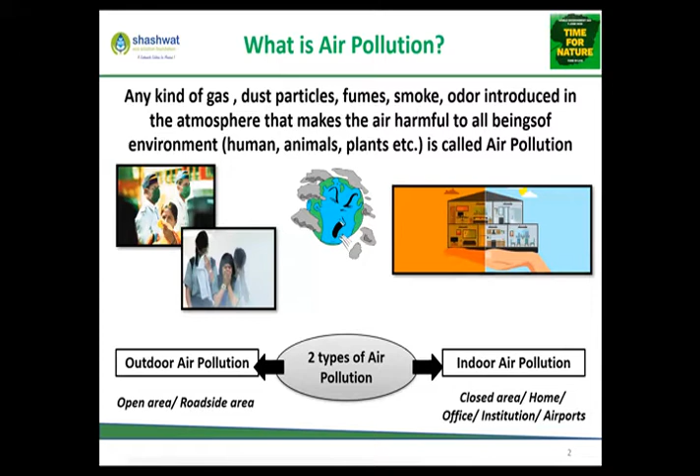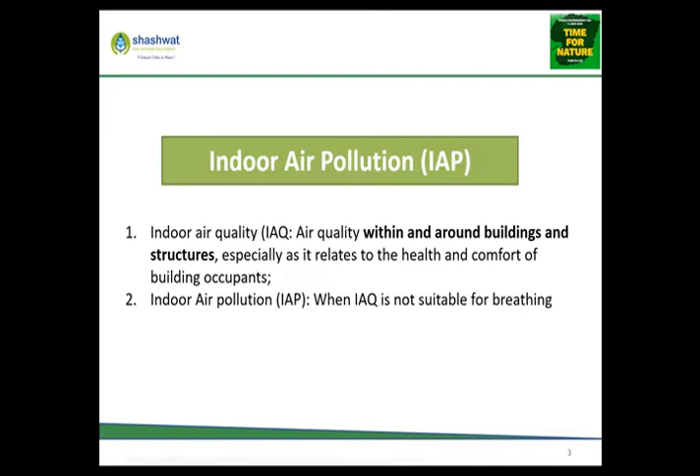So let's understand what exactly is indoor air pollution. Before that, let's understand what is indoor air. Basically, that air which is inside any enclosed area is indoor air, and the quality of that air is indoor air quality. If that quality is not suitable for breathing, then we say that indoor air is polluted. This is the simple way we can define indoor air pollution.

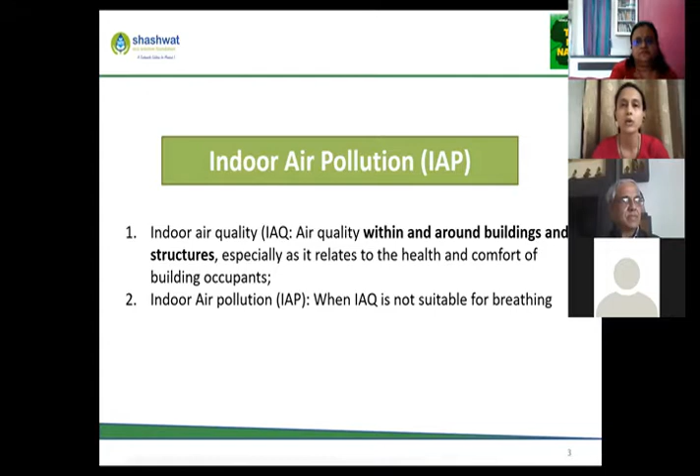So what exactly comprises the indoor area? It is not just restricted to our houses, but also includes offices, workplaces, institutions, malls, airports, temples, warehouses. All these areas are enclosed within walls, may it be small or big, but they are enclosed. Whatever air is present inside is called indoor air, and these areas are called indoor areas.

The major sources of particulate matter 2.5 in our day-to-day activities is burning of dhoop, agarbattis, or mosquito coils. These are one of the major sources. Then there is garbage burning near my house; the polluted air generated from the garbage enters through the windows or doors into my house, and then my indoor air also gets polluted. This is also one of the sources of indoor air pollution, especially dust particles, that is particulate matter 2.5, and also carbon content.

Then comes cooking fumes, or burning of chulhas or kerosene. All these things generate carbon monoxide and particulate matter, and also water vapors. So they are also one of the sources.

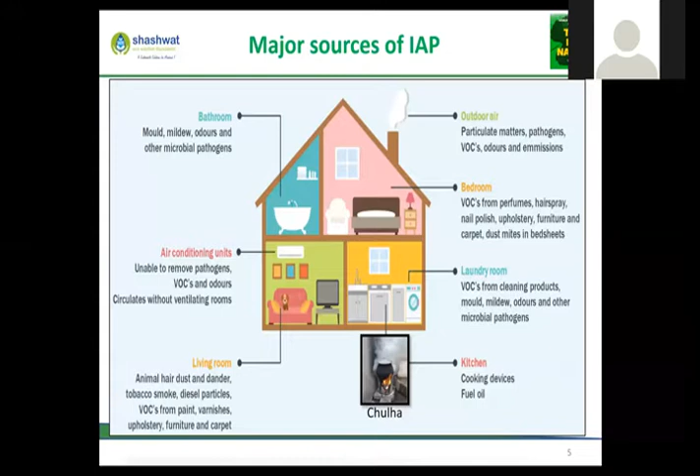If we rightly remember, government has also appealed to all of us to reduce the use of ACs and increase proper ventilation. This was one of the reasons, because air conditioning units just circulate the air within. So if I am in a place with a COVID infected person, the droplets of his infection may pass through to me in those air conditioning units, because the air is getting circulated. So this is also one of the sources.

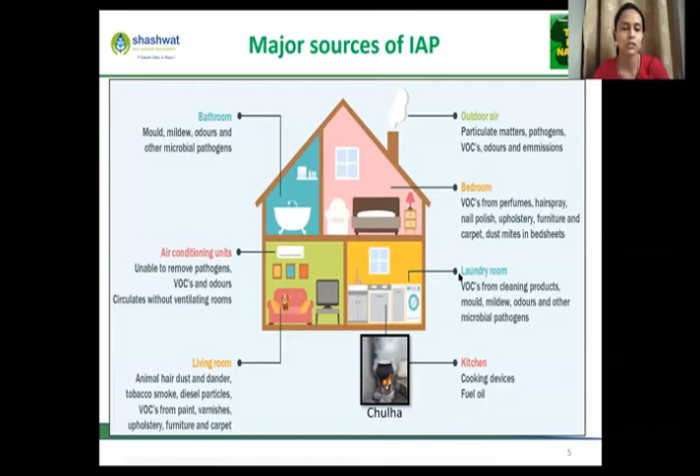There are many other sources of indoor air pollution, but we are going to mainly focus on particulate matter 2.5, carbon dioxide, and volatile organic compounds.

Now, why is this so much important? Why are we speaking about indoor air pollution? Basically, because of its health impacts. In fact, I had read an article in the Times of India newspaper where it said that indoor air pollution is almost 10 times more harmful than the health impacts caused by outdoor air pollution. So I guess this is one of the reasons that this topic has been included into our health ministry, that is Ayush Mantralaya, what we call.

So now, what are the health impacts? The short-term impacts are coughing, throat infections, sneezing, dizziness, fatigue, all those things similar to outdoor air pollution. And the long-term impacts are heart diseases, respiratory diseases, and even cancer. These are similar to outdoor air pollution, but the intensity is much more.

And if we remember, government had also asked people having respiratory problems to be more careful, as they are more prone to COVID infection. So pollution leads to respiratory diseases, and respiratory disease having persons are more prone to COVID infections.

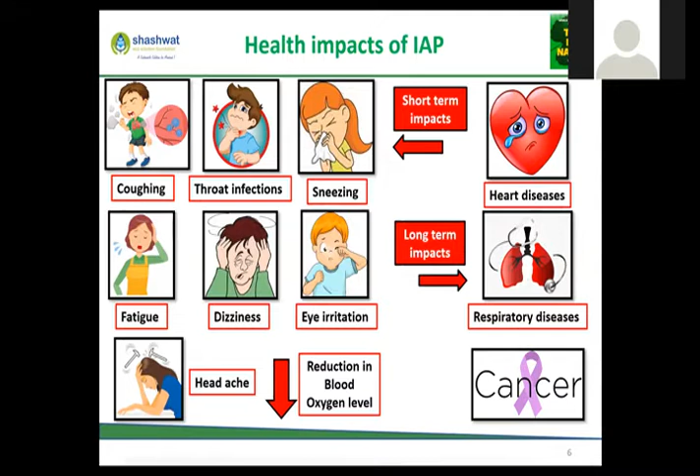So we have discussed the topic, we have discussed its concept, its ill effects. Now let's focus on what are the steps to improve the indoor air quality. So first is proper ventilation, which is very much important. Then comes availability of a doormat or a shoe stand at the entrance of the house. Most of our houses have it. The main reason is that we avoid the entry of pathogens, germs, dust particles, or particulate matter into our house. So this is important.

Then we have to use non-polluting mosquito repellents or room fresheners. This would decrease the levels of volatile organic compounds. Then use of exhaust fans in kitchens or toilets. These would basically circulate the air from the outdoor and indoor. So exhaust fan while cooking is very important, and also in toilets, because toilets are smaller in size and they are also enclosed. So exhaust fans are important.

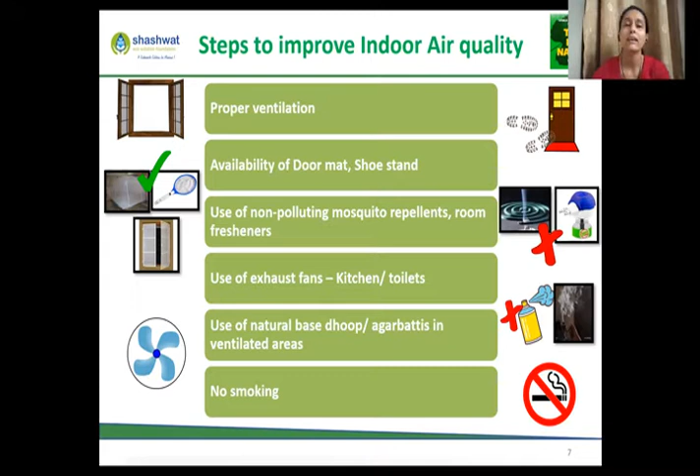Then use of natural base dhoop or agarbattis, but in ventilated areas. These reduce the amount of volatile organic compound levels. Then obviously no smoking, because smoking we all know is very much harmful. It generates nitrogen oxides, and it also generates particulate matter and carbon levels. Then regular cleaning with natural cleaners, because synthetic cleaners generate volatile organic compounds.

And then we also have to use indoor plants. We all know plants are a boon to us, and indoor plants basically absorb carbon dioxide, release oxygen, purify the air, and also absorb volatile organic compounds. So indoor plants are also very important. And also we have to maintain a healthy level of humidity to avoid the development of molds.

We have very well researched data from Dr. Salvi. He is the director of Chest Research Foundation, Pune. In his research, he stated that burning of one mosquito coil is equal to the generation of particulate matter 2.5 produced by 100 cigarettes. So that is the intensity. Like we all know, cigarette smoking is bad, and one mosquito coil is 100 times more harmful than a cigarette. So this indicates the intensity of why indoor air quality is important, and why reducing indoor air pollution is important.

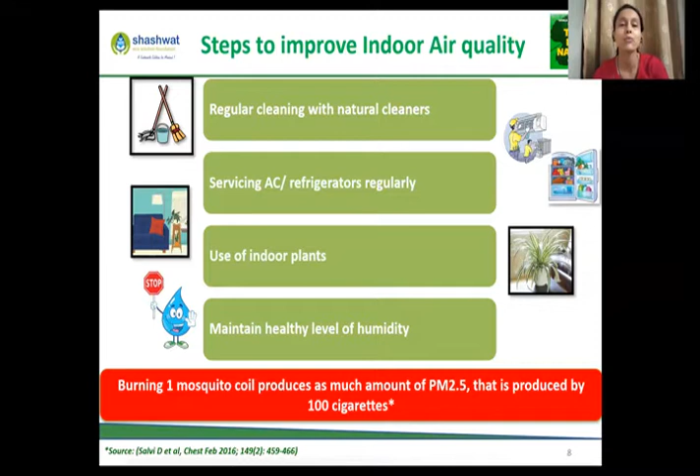Now we come to the pilot case study. The concept and implementation was done by Shashwat, and it was funded by Cummins India Foundation. This pilot case study was conducted around 2 years back, and it started because before that Shashwat had participated in a conference, where we were fortunate to understand and get to know about this concept of indoor air pollution from Dr. Salvi himself. Later on, our director, Mrs. Pradnya Thakur, understood its importance and developed this concept into a project. So the main project objective was creating awareness about this topic, because this topic, as I said, is not much known, not much spoken about.

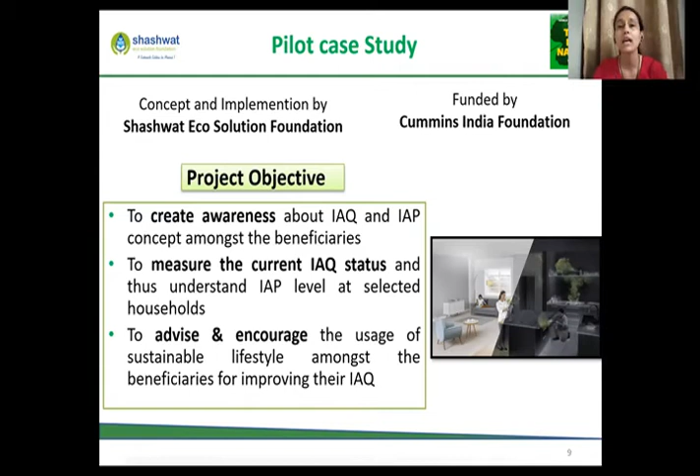We don't even know that our air is polluted, so creating awareness about this topic was our main focus. Measuring the current indoor air quality status of our beneficiaries was the second objective. And the third was to encourage people to start using indoor air quality improvement steps. So these were our objectives.

For implementation, we chose a few households as beneficiaries in and around Cummins office, some urban middle class and some urban slum, economically lower income groups. We chose this because the problems of both types of households are different. In urban slums, the house area is small, they are more crowded, less ventilated, and the houses are situated very close to each other.

We understood their existing indoor air quality practices through a questionnaire. Then we monitored their indoor air quality with devices given to us by Cummins. Two devices were given: one measured particulate matter 2.5, and the other measured carbon dioxide and volatile organic compounds.

The main step was conducting awareness generation workshops for the beneficiaries.

We also provided them with indoor plants, and gave them information on where to get natural sources of cleaners and related products. This was our basic focus.

After the awareness generation, we gave the beneficiaries time to implement these indoor air quality improvement steps. Then we did a post indoor air quality check and came to some observations. We received very little time compared to the scope of this project, but the observations we found were very important, and with the COVID aspect, their importance has increased even more.

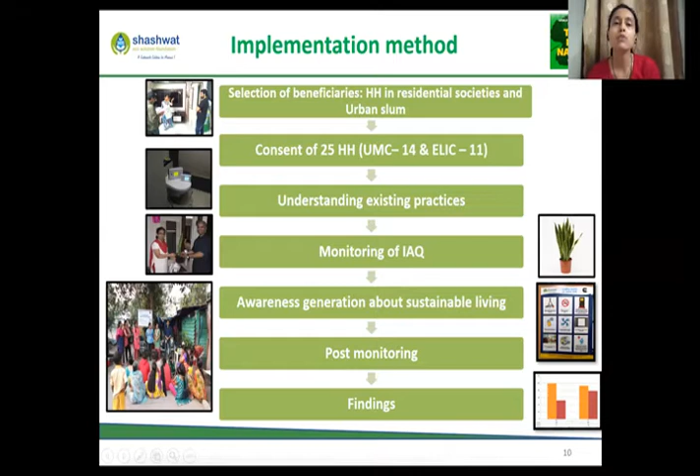As mentioned earlier, these were the three parameters we selected: carbon dioxide, particulate matter 2.5, and volatile organic compounds. These are their standards, their range from good to alarming situations. We took this from the booklet provided to us by Cummins that came with the device, and used these as the standards to conduct our survey.

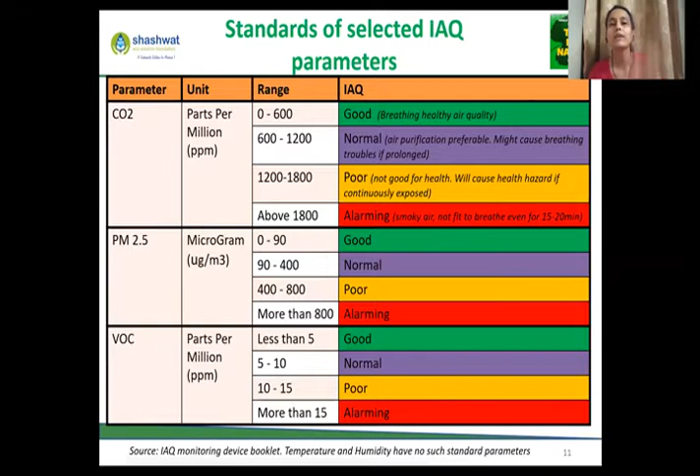Now, what were our exact observations? The first and foremost was that indoor air pollution exists. This was our observation because in almost all the houses, across all parameters we considered, the ranges were more than normal. So we observed that we are living in an indoor air polluted area. That was the foremost observation.

The main observation was an increase in particulate matter 2.5 and volatile organic compound levels when using synthetic dhoop and agarbattis. If the area is not properly ventilated, or the windows are closed, the increase in particulate matter 2.5 is even greater, especially while cooking or using dhoop, agarbattis, or mosquito coils.

There is also an increase in carbon dioxide levels. We have first-hand data showing that in an enclosed, closed kitchen while cooking, carbon dioxide levels shot up to 1500 ppm, while the optimum level is around 600. When we lit dhoop and agarbattis in a closed area with improper ventilation, PM 2.5 levels shot up to 200 micrograms per cubic meter, while the optimum level is around 90. This is the first-hand information we received.

Regarding the use of indoor plants, we observed that the area near indoor plants had much lower carbon dioxide levels than other parts of the house. We all know that indoor plants absorb carbon dioxide, release oxygen, absorb toxic gases and volatile organic compounds, and also purify the air. These were our important observations related to indoor air quality.

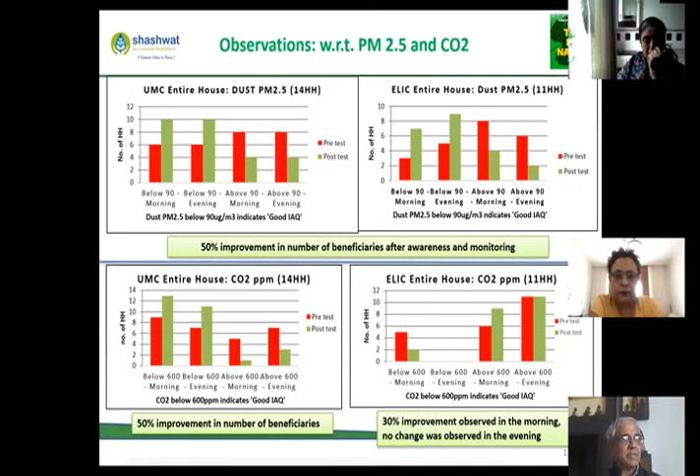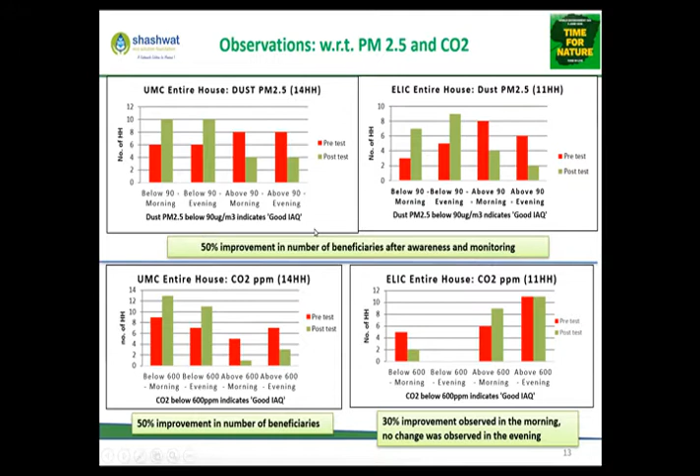Then all the people who are out for work enter the house in the evening, so they are more crowded. Along with this, the areas are small and located close to each other. So these might be a few reasons why carbon dioxide levels have not improved much.

Now why have we included this in this webinar? What is the relation of indoor air quality and indoor air pollution with respect to COVID-19? Why are we emphasizing so much on particulate matter 2.5 and carbon dioxide levels? We all know COVID transmits through droplets of sneezing, coughing, or speaking of an infected person, directly inhaled within an area of 1 meter. But researchers have found, in many ongoing studies, that particulate matter 2.5 can be a carrier for COVID-19 virus transmission.

WHO has also not denied this possibility. They have stated that in crowded or polluted areas, or air with a lot of pollutants, especially particulate matter 2.5, the rate of COVID transmission may be higher. So we can conclude that 1 meter social distancing would no longer be sufficient, because the virus can take support of carriers and transmit much longer distances.

So basically, at crowded or enclosed places, this virus may become airborne if indoor air quality is not maintained or if there are a lot of pollutants present, increasing the chances of COVID transmission or any other virus transmission. When it comes to urban slums and their challenges, these places are crowded, situated next to each other, and have less ventilation. Considering all the research on COVID transmission, we can say that urban slum areas are more prone to COVID transmission.

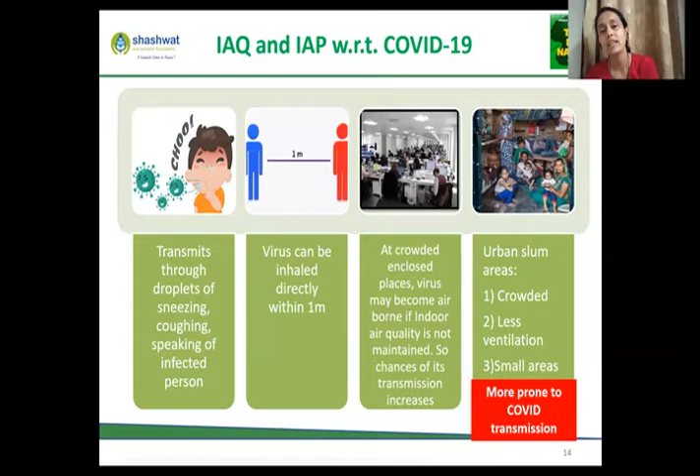So while concluding, I would like to say that we wear a mask when we go outside just to avoid inhaling the COVID virus. But if it so happens that COVID becomes airborne, wearing a mask 24/7, both inside and outside the house, is not possible, not recommended, and not healthy. So basically, wearing a mask is not the complete solution.

What we can do instead is maintain indoor air quality, and reduce indoor air pollution and pollutants in enclosed areas or households. This basic step is very important, I feel. With this, I conclude my session. Thank you, everyone.

Let's start with the challenges in the urban area. These are some urban challenges we have gathered based on our study. Urbanization leads to migration in the cities and increase in population, increase in slum dwellers, load on infrastructure, challenges for cleanliness especially in slum areas, challenges of water supply and wastewater, challenges of solid waste management, challenges of sanitation and maintenance of community blocks for the urban poor, and social behavior issues like spitting and littering.

Let us go to the case study. This is about Walkeshwar, D Ward Municipal Corporation. The total population was 68,000 plus. The population covered under this study is 802. Population covered under various activities is 117. We have also targeted women SHGs and NGOs, that is 2 numbers. This graph shows which area we covered for this case study.

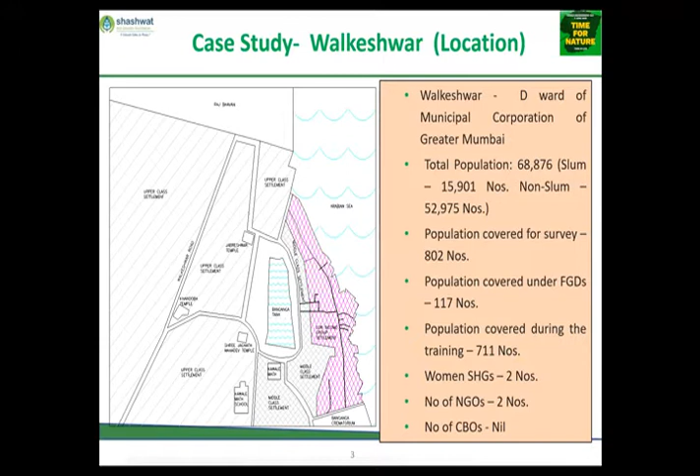This is the second part of the study, that is toilet mapping. You can see some photos depicting toilet mapping. What we observed is toilet facilities are less in number to serve the current residents. The residents resort to open defecation. Toilets present are not maintained properly; they are all in unhygienic condition, especially with respect to women. There is absence of electricity and it's unsafe to use at night.

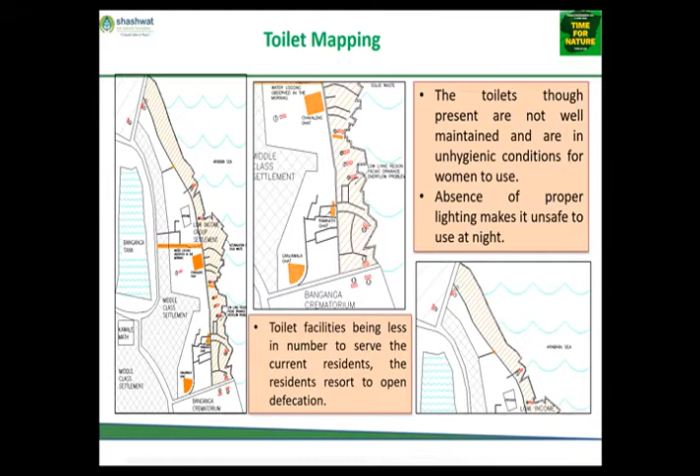This particular slide shows mapping of the drainage system. Here, the green lines depict storm drains, pink lines are open drains, and blue lines are drinking water lines. What was the observation? The drain lines are covered by tiles. The storm drain is used as a regular drainage line. All drains show flow of water towards the sea, and there is an absence of municipal closed drain lines.

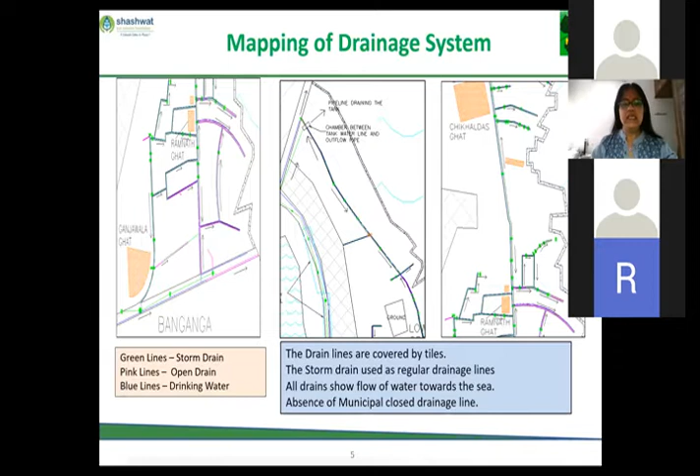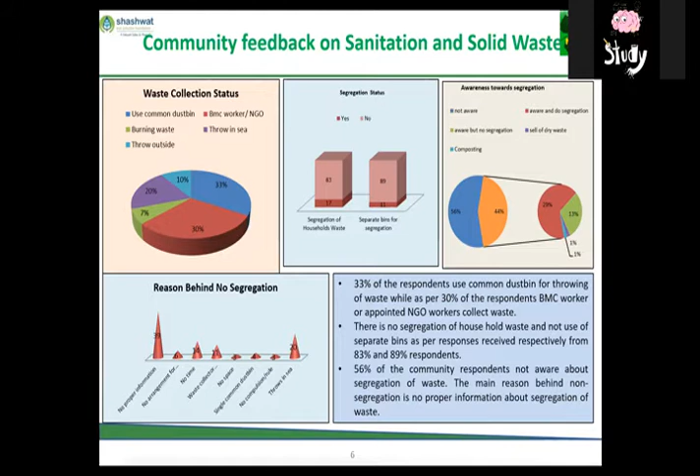Next, we have done a survey in that area at Walkeshwar, and the community feedback shown on screen shows waste collection status. 33% of respondents use dustbins for waste, but 30% said it is collected through BMC or NGO workers. There is no segregation happening in this area. 56% of respondents are not aware about segregation, the reason being that information about segregation is not given to them.

What are the key findings of our study? Littering in slum pockets, no segregation. Drainage choke up due to waste disposal in drains. Lack of cleanliness practices and attitude leads to very unhealthy conditions in the community. Restricted use of toilets because of non-maintenance and no electricity. Demand and need from women for toilet maintenance and sanitation, by vending machine with disposal system.

Lack of monitoring system for sanitation and solid waste management. Demand for safety equipment by sanitation and SWM workers. There is no CBO, that is community-based organization, established in this pocket to take care of any hygienic situation that should be there. Community is maintaining cleanliness on a voluntary basis, so there is no regular checkup on that.

Need for sanitation and solid waste management. Based on our study, these are some identified needs in this area: need of spreading awareness about segregation of waste, availability of separate bins for collection of dry waste and wet waste, need of more public toilets and CBO structure for maintenance, more frequency of waste collection and cleanliness to reduce problems of bad smell and spread of mosquitoes, need of safety equipment which should be comfortable, environmentally friendly and good quality for cleaning staff, proper resting and luggage keeping room for cleaning staff, training to sanitary workers for efficient use of safety kits, and need to establish a CBO system for better waste management.

There are a few questions for you from participants, but let's move on to Mr. Manish Sahu. Aditi has given an introduction. Welcome Manish ji to this panel discussion. Manish ji has worked with the Garima project with Tata Strategic, which was a very important factor. Like we have all the warriors in the COVID situation, one of the warriors of this entire situation is the sanitation worker, and the health and safety aspect of this warrior is utmost important, which since long has been a very neglected topic. So I will request you, Manish ji, to share what needs to be done for the safety of these warriors in sanitation and solid waste management.

Thank you, Pradnya ji, and very good evening to everyone. So suddenly, due to COVID, all the public has gotten an awareness on personal protection equipment. People are demanding masks, they know the difference between FFP1, FFP2 mask, mask with valve, gloves, all those kinds of things. But before that, there was limited understanding among the community on protective gears, and also among the sanitation workers.

As Anand ji has mentioned, and also as we have seen in previous slides, there is a lot of infra, tools and equipment present in a community which help maintain hygiene and sanitation. But it's equally important to understand, acknowledge and appreciate the efforts of sanitation workers. On social media, the efforts of frontline functionaries and sanitation workers are much appreciated, with people pouring flowers over them. Definitely we should appreciate their work.

During COVID, post COVID, and before COVID, the protection of sanitation workers has been a major issue, and various agencies are working towards it. MCGM, as part of their program, is also working towards it.

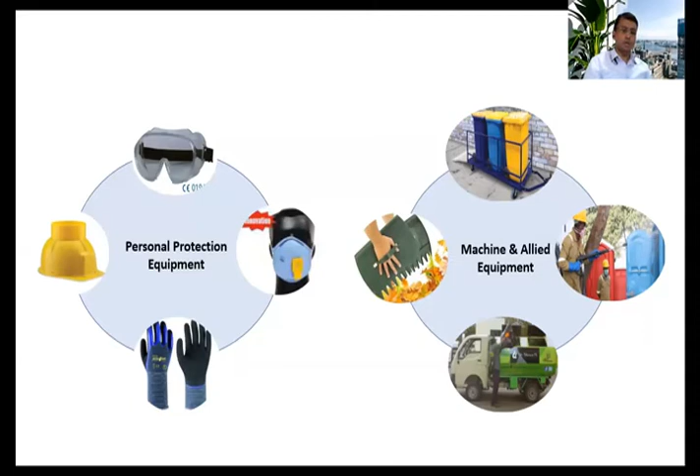In the study, we found many health and PPE-related issues faced by workers when we interacted with them across several wards. These workers are exposed to pollution and harmful gases, and hence require a proper mask that could help protect them from pollutants.

While cleaning house gullies or narrow lanes, people throw garbage out of windows, so there's definitely a requirement for helmets too. Many workers we interacted with were not using personal protection equipment, either because the equipment was not appropriate, it was very uncomfortable to wear, or they were not aware of its benefits, use and maintenance.

With respect to machines and allied equipment, these are tools that help reduce drudgery among workers and build effectiveness and efficiency in the work. Workers mentioned that while they have bins and brooms, these break quite often. Road cleaning in slum areas was very difficult, and sweeping under parked cars was a major issue. These were the issues identified among the sweepers.

I'll take you through the issues identified among the various categories of sanitation workers, then get into the personal protection solutions that were recommended, and what any municipal corporation or agency could consider while procuring machines and allied equipment.

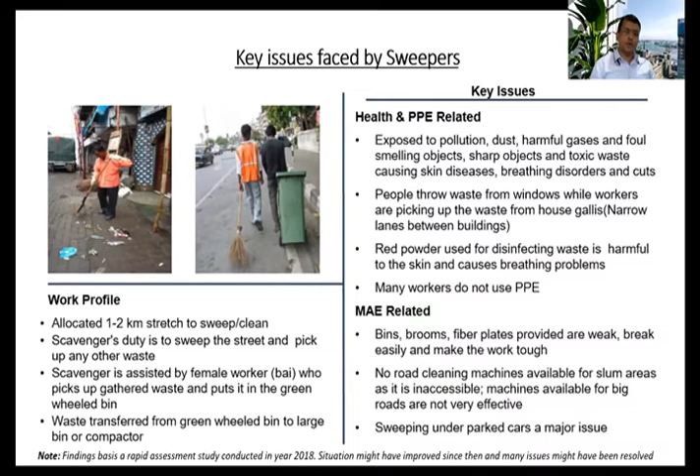With respect to toilet cleaners, as Anand ji mentioned, community toilet blocks are very critical during COVID, and there is an SOP for their use. But it's equally important that workers cleaning the sanitation toilet blocks are protected and have proper machines and tools. MCGM has procured a lot of tools and is using them.

With respect to toilet cleaners, the kind of disinfectant or chemicals they were using, and the masks they wore at that time, were not adequate. The mask was not proper and was not protecting the workers. Also, the gloves they wore made their hands very sweaty while using them.

With respect to machines, typically no particular machines were being used — they were using a jhaadu and a bucket just to clean the toilets. There were also other issues like clogging of the holes in the toilets.

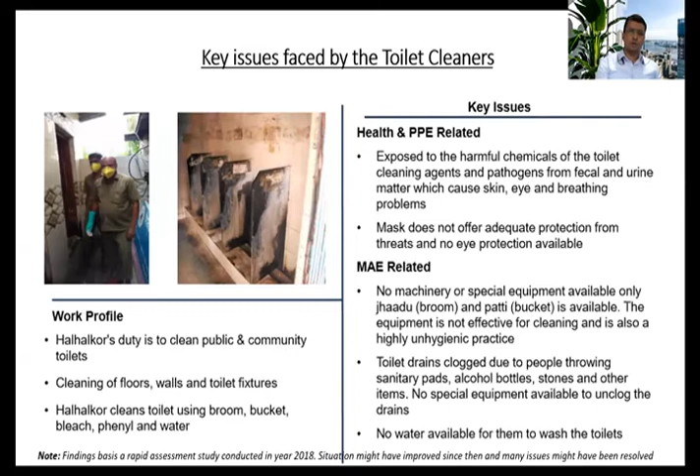Also, the motor loaders wear chappals, and they pick waste. As we know, in our country the waste is of very poor quality, not segregated. The waste would have harmful chemical substances, blades, and other such things. But these people were not wearing shoes. It was not that shoes were not available, but the shoes were not appropriate or comfortable for them to wear while walking with the truck for maybe a kilometer or so. So these were the issues we identified.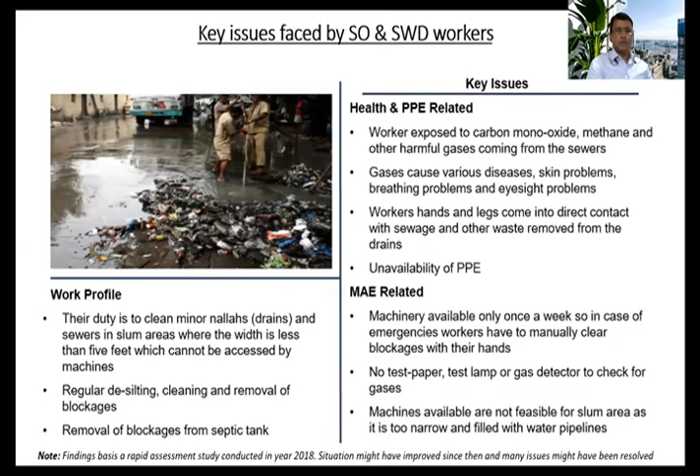As solutions, indicative solutions to MCGM, we provided an entire list of solutions across various categories of workers. But as an indicative solution, I'd like to present that any sanitation worker involved in manual cleaning should have better PPE - better protective gear that is comfortable, appropriate, of better quality, and also cost effective.

And definitely the workers should be sensitized - not just made aware of what protective gear to wear, but sensitized on how to wear the mask or protective gear, and how to maintain and dispose of it. Currently in the COVID situation, we see people wearing masks, but many are not wearing them properly. And the disposal part - how people are disposing of masks - is still a big question that is not addressed.

We were also able to identify a lot of good machines that would help reduce the drudgery and bring effectiveness and efficiency in the work sanitation workers are doing. Currently in Mumbai we are seeing this kind of glutton machine - a sanitation worker walks with the machine and it picks up waste. These kinds of machines are required to make the life of sanitation workers more comfortable, give them a sense of dignity while working, and bring effectiveness, efficiency, and hence productivity to the work.

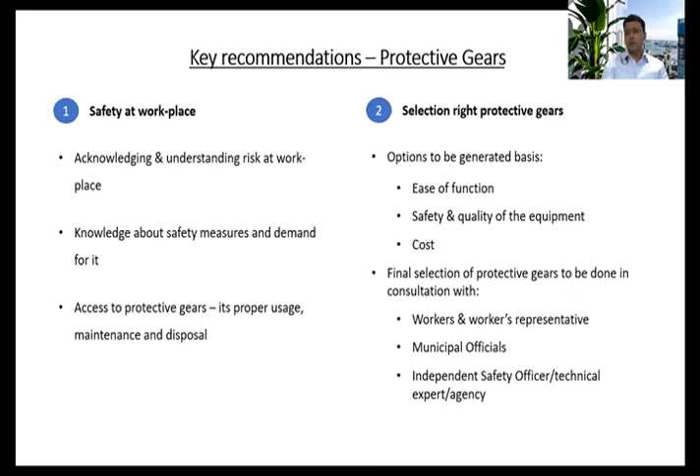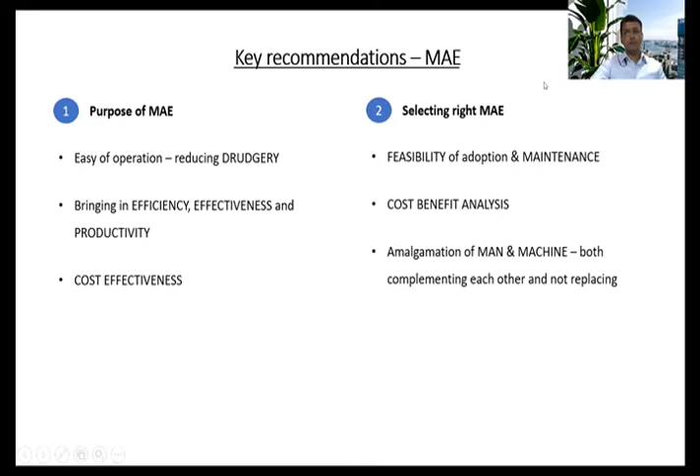So with this, I would like to end my presentation, and definitely if there is any question, then I'll be happy to take that.

Thank you, Manishji, for a very nice and informative presentation, with all these recommendations. Basically the PPE word which we were not aware of, and now the country is aware, almost all, of what is meant by PPE. This terminology was not so common earlier. So basically these are all the changes and opportunities to improve, because I think this study was done two years back, and with COVID, now things have come up that we should learn all these aspects.

We should take it very seriously. One question is - from what you have presented, we learn that the consultative process with community safety, health, hygiene are major aspects to be taken care of by the workers, because if they exist, then our life exists, because they do the cleanliness part of our cities. So they should be recommended and treated very well. That is one takeaway from this entire presentation. But what changes do you suggest the urban local bodies need to make in this process after the COVID aspect, from all these solutions and recommendations?